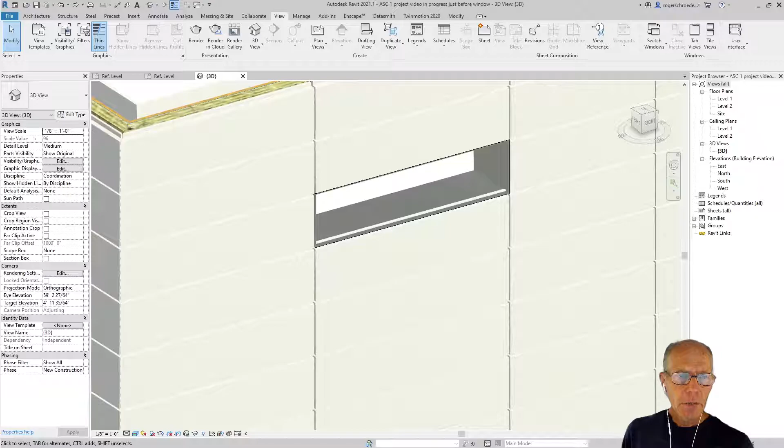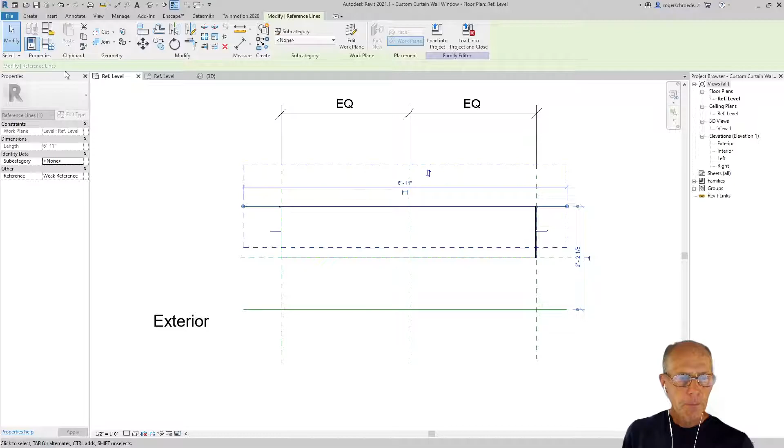With that in mind, if we look at the actual window we've drawn, which was flipped around, let me get over to the right sheet here. That's the profile, let me get to the next one. The exterior is really over here, and this line needs to be on the other side, so I'm just going to mirror it over. So now everything is correct, so to speak.

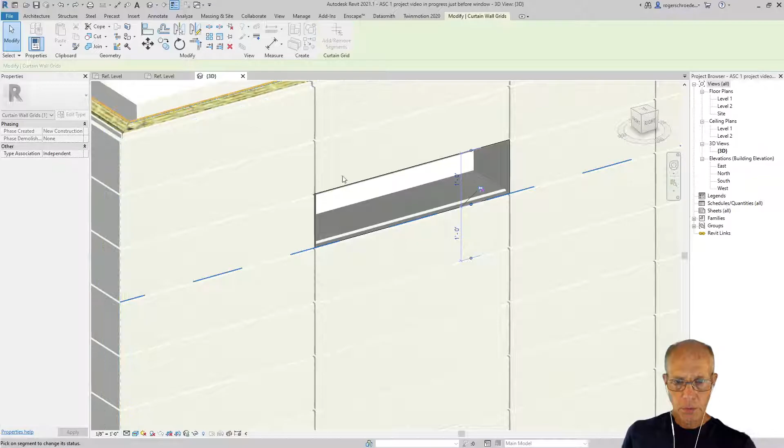So let's now deal with some of these window issues. I'm going to show you the window doesn't have to be just a replacement of a single tile. We can go in, unlock this one, remove this segment, and the panel will disappear, but don't worry, that'll be corrected in a minute. I'm going to remove a couple more segments, grab this one, unlock it, and remove that segment.

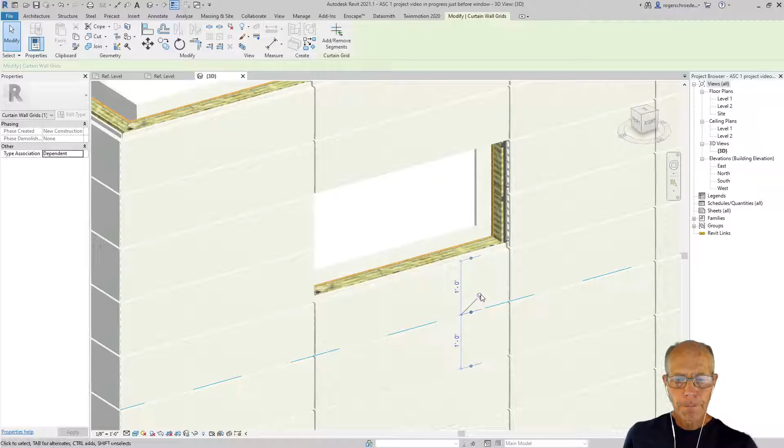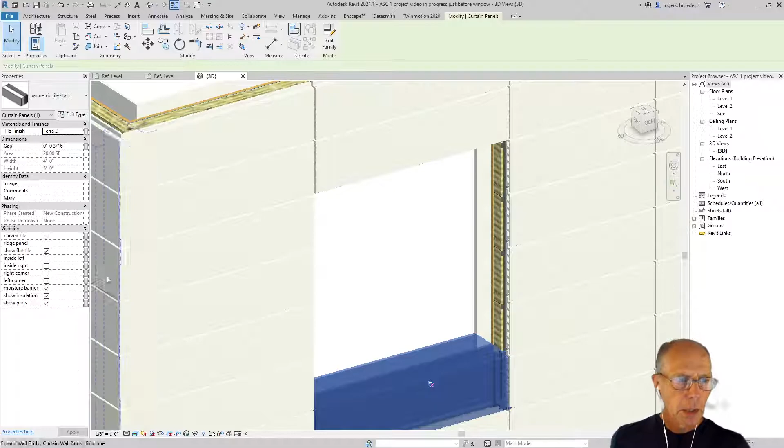There it goes. We'll keep working our way down here a little bit, and we'll do one more. Okay. Now I want to grab this tile here, because I want to unlock it and replace that with the window system.

And you'll notice now how that expands up. We still have that interference issue, we're going to deal with that next. But let's take a look at what this all looks like in sections. I'm going to go to level 1 here and just cut a little section through this.

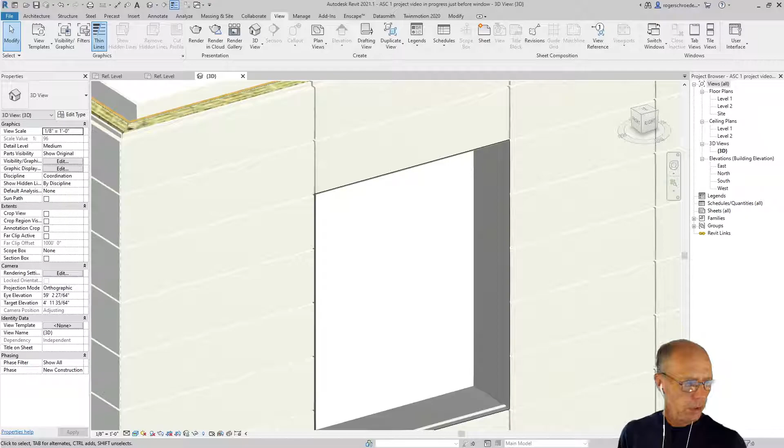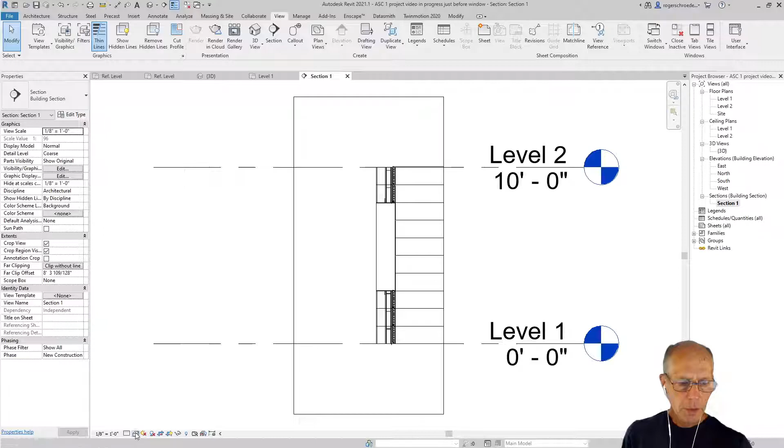We'll render it because it'll be a little more legible, and you can see the nice detailing you get off here. You can actually see the structure of the tiles. I'm not sure what this other visualization is, or why we're seeing that other little piece of ghosted tile. It almost looks like something is out of position. I could troubleshoot that later. So anyway, you can see now the interference at the top of our tile.

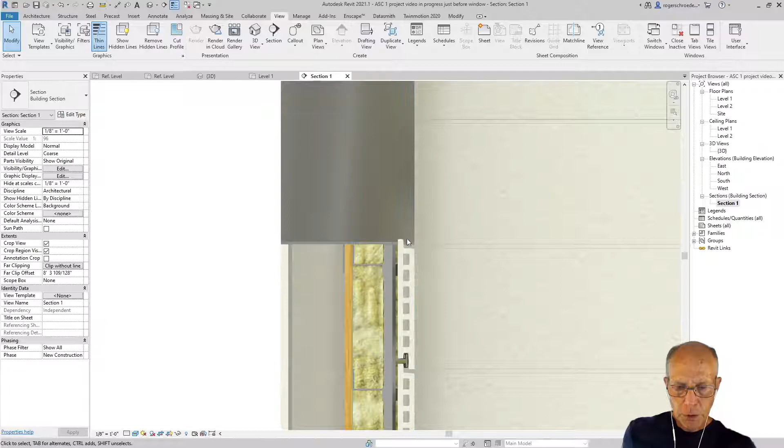So the bottom of our window needs to be raised up, and then we need some kind of filler in there, either a shorter piece of tile or maybe a piece of aluminum. You can also see there's an error in the way I drew this, because even though I put this little edge here to indicate the inside of the wall, I don't have the right alignment of this to the face of the plywood. So there's some kind of error there I need to correct.

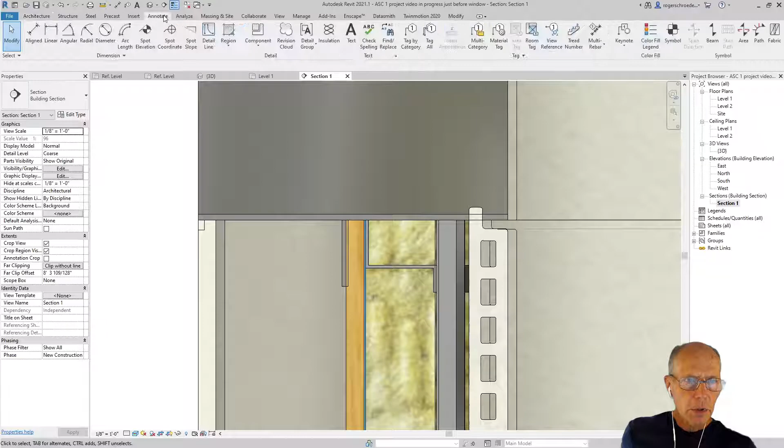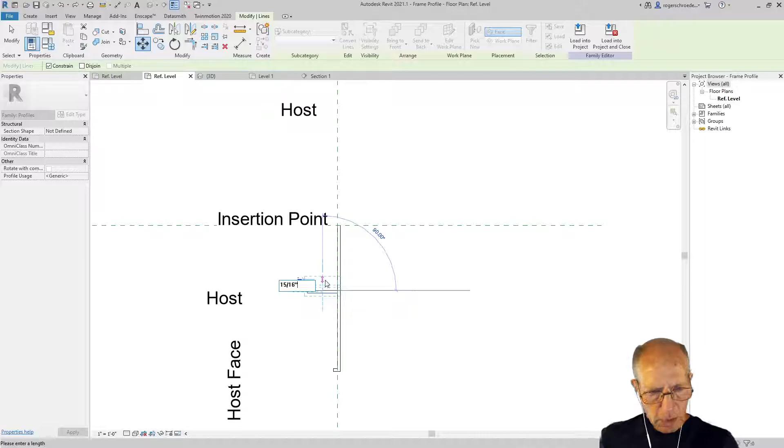Let's just take a measurement of that. That's 15/16, so I'll try to remember that number to move that flange forward. Let's see if we can find that profile, I have it still open. We know we want to move up, so I'm going to grab all of this, grab the move tool, and come up 15/16 inches. We'll go ahead and save that.

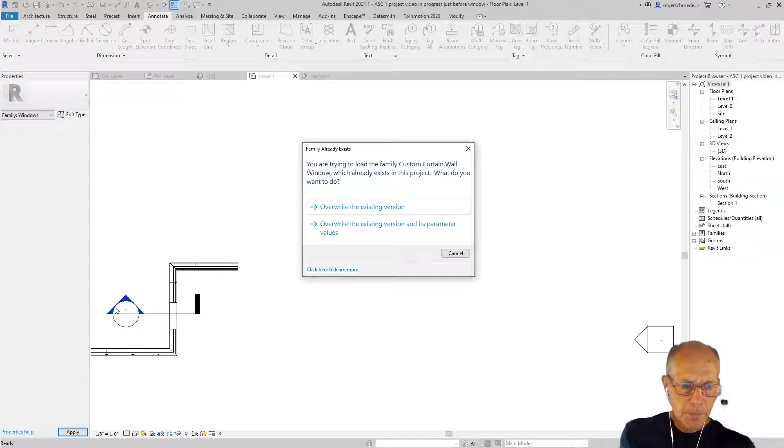Load it into the project, into the custom window. It's not showing up on your screen, I need to move this over. Overwrite the existing version, and that moved a little bit deeper. So I can now load this into the project just to see how that's passing on through. I'll load that back into the main project and overwrite the existing version.

Then we'll go back to that section again. I must have moved it 1 and 15/16 or something. Let me just go back and quickly correct this. Hold on. Yeah, I measured that to the wrong point, I wanted to come to the face, so it's the face of this edge.

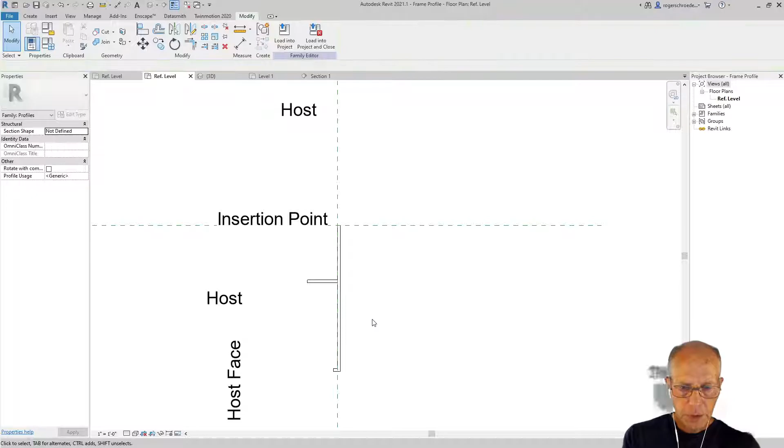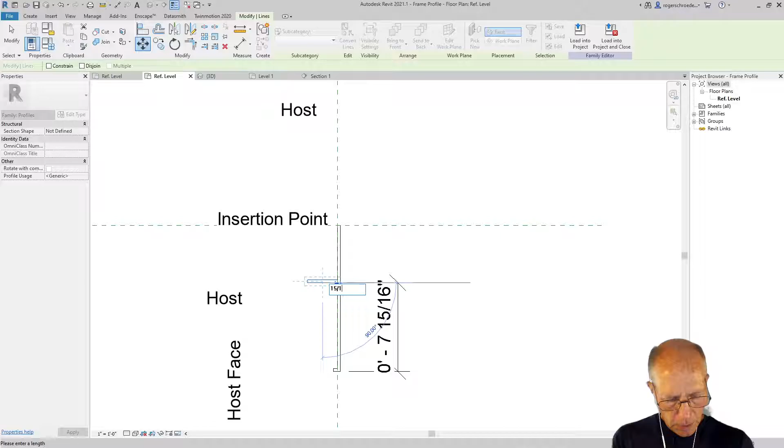Bear with me a second, sorry. It's 7 and 15/16, so I maybe moved it in another video also and then redid it and forgot I hadn't undone it. So I'm going to move this down 15/16. It's not going to be a problem for you. That gives us back to our 7 inches for our flange.

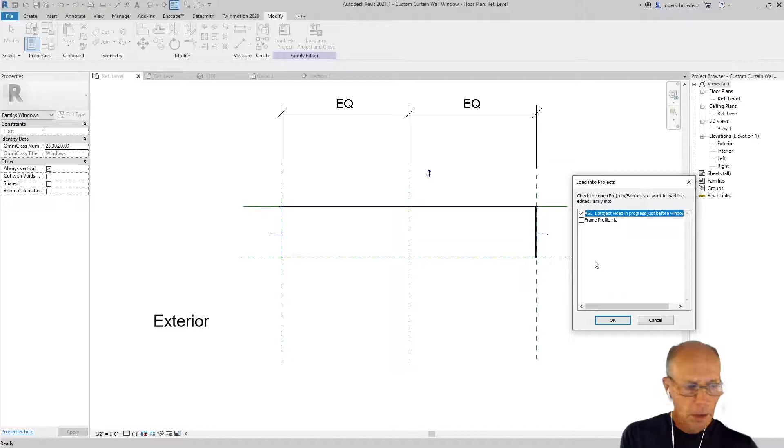We'll go through the process again, load it back into the window assembly, not the main project. We'll overwrite that version, then load that back into the main project. And we'll take a look at the section now. Now I'm sitting in the right location, right at the front of that, so that part's corrected. We need to now correct the bottom of that.

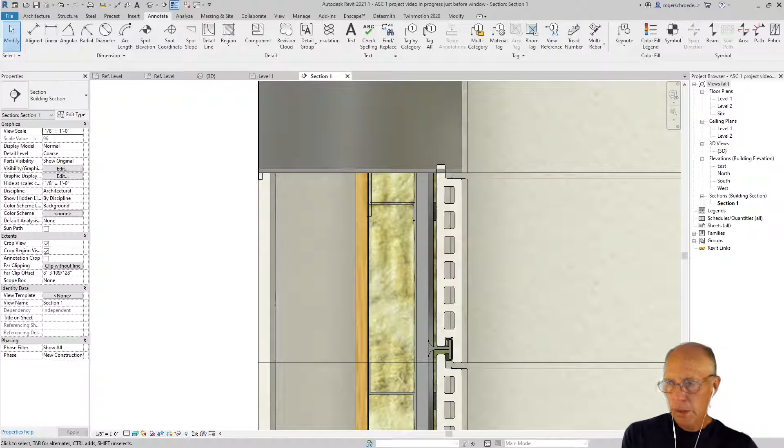Actually, we're 6 minutes into this video, so I'll pause it here. When we pick up on the next video, we'll deal with moving the bottom of that sweep up.